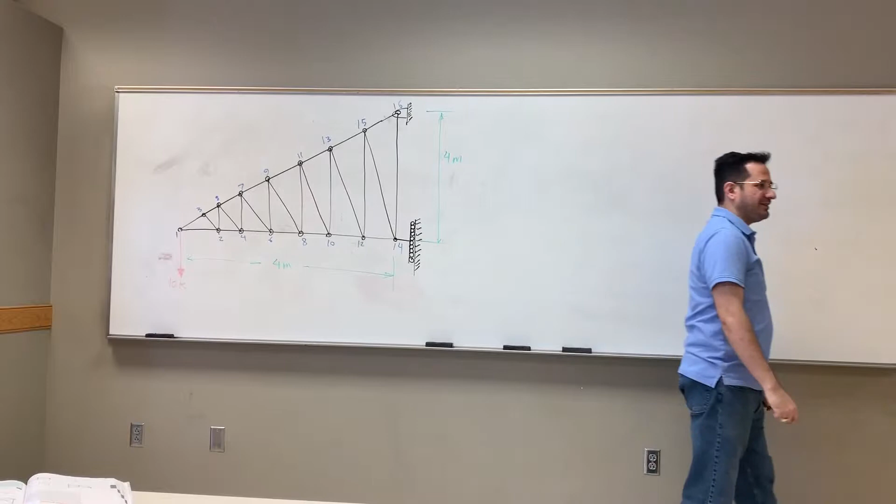So here, if I ask you, this truss is given, find the force in all members, and you only have 2 minutes, then it's kind of like a big confusion. Well, if I write the joints, I have 16 joints, each one has 2 equations, so I have 32 equations to solve. How can I do it in 2 minutes? Right? But you got to be a little bit smarter. Say, I have this technology of zero force members that I can eliminate before I analyze my structure, so I can clean it up. So, where can I find my zero force members?

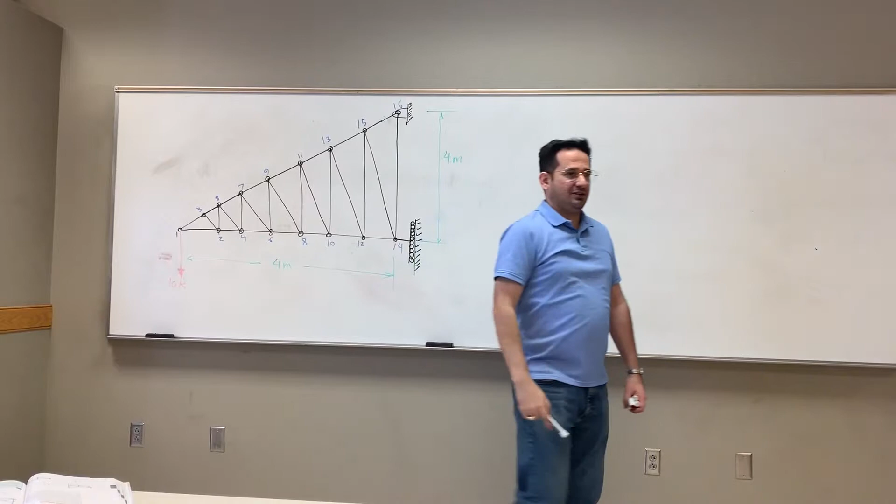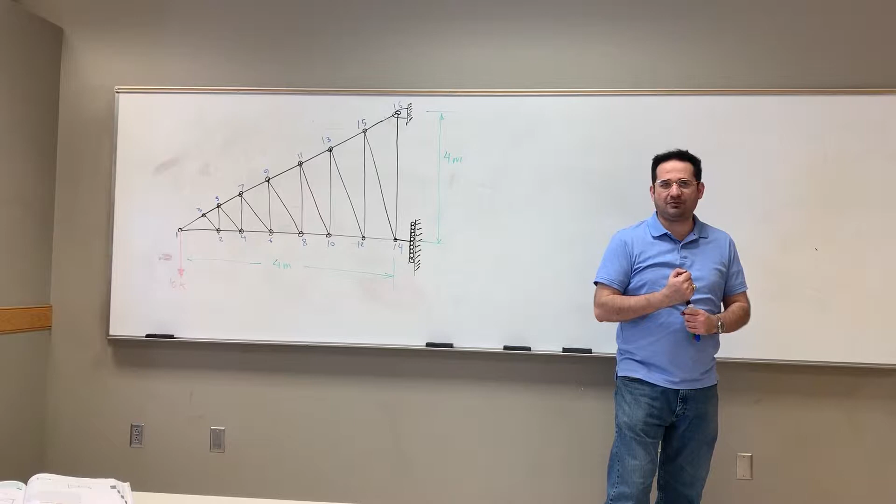Do you have any idea? So zero force members are either 2 members, 2 bars connected together, no external reaction, both of them zero, or 3 bars connected together, no external reaction, and 2 of them must be collinear. The third one is 0. Which one happens here? Or maybe both. Can you find it? Do I have zero force members here? Which one? 3. At joint 3? All of the middle ones. Exactly. That's the conclusion. We reached that. So

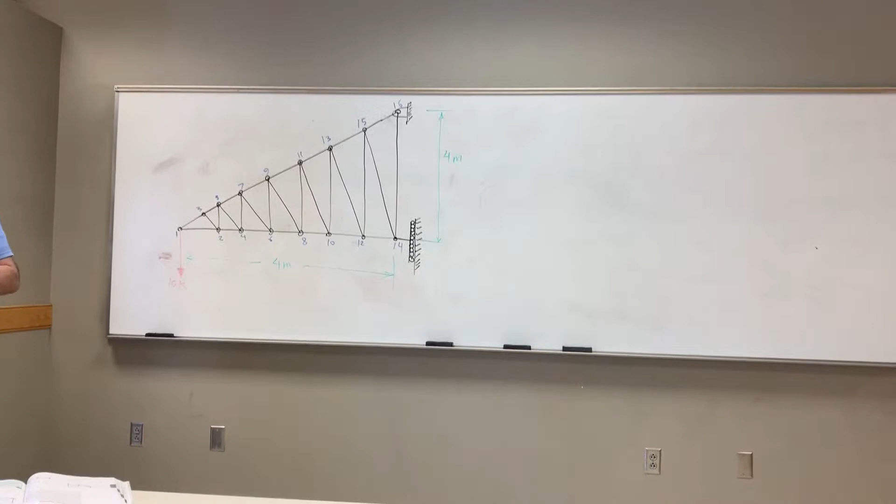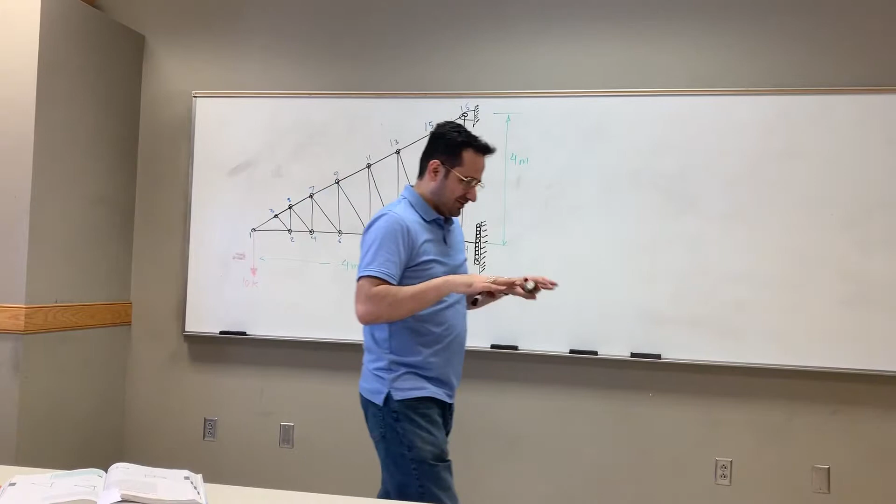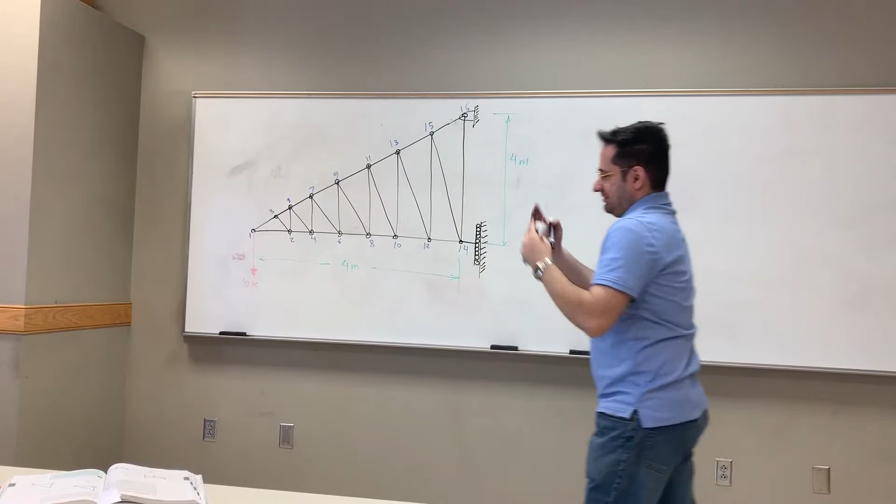Some people go super fast, and some students don't know what's going on. I mean, we always have a big difference in the classes. I don't know why. Like the pattern we had in the midterm, it's always the case. Some students are super duper good, and some students are just super duper, you know, sucky. We don't have average. I'm just confused. Why is this the case? I couldn't figure it out in these years that I've been teaching here.

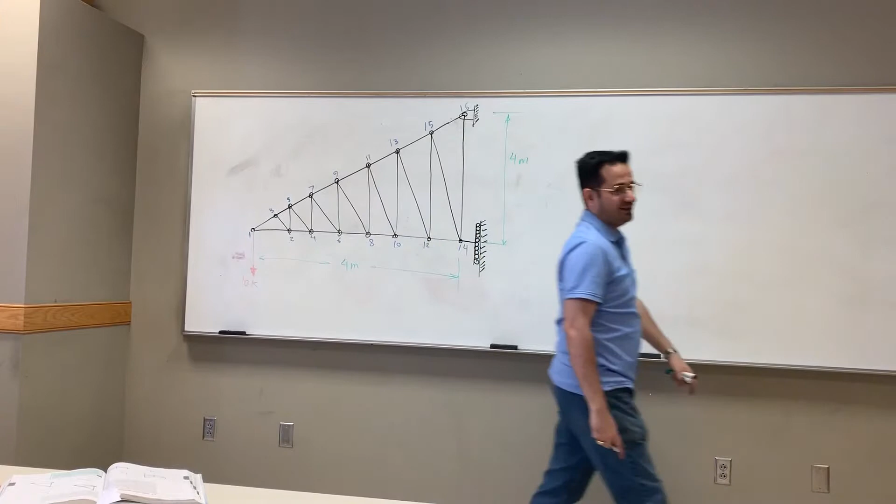But as you can see, joint 3, right? Joint 3 is a good example of the second part. We have 3 bars connected together. No external reaction. Like if I have a force 2K here, I can't say this is a zero force member. But look, joint 3 is free, no external reaction. 3 members connected together, and 2 of them are collinear. So the third one should be 0. Which one? This guy. The force in this member, 2-3. So if the force is 0, I can clean up the structure before, because it has no effect here, right? You can just get rid of it.

Force is 0. That is only put there for the purpose of stability, like in a case that you have a force here. Because the structure you design should be robust. If you have arbitrary loading, worst case scenario, then it should resist. So these are extra bars put here just for the purpose of stability. But in this special case, you can just say this is 0, right? Am I done now? Now you go to joint 2.

So you're saying these bars are solely there for stability? They don't help the structure whatsoever? Because you can take this and apply it to a bridge. But those bars aren't there for stability, are they? Yeah. So let's say you use it for a bridge, but let's say a bird is flying, comes and sits right here. This is the bird, right? If it sits here and you don't have this third member, this structure is going to collapse. So this is purely for stability.

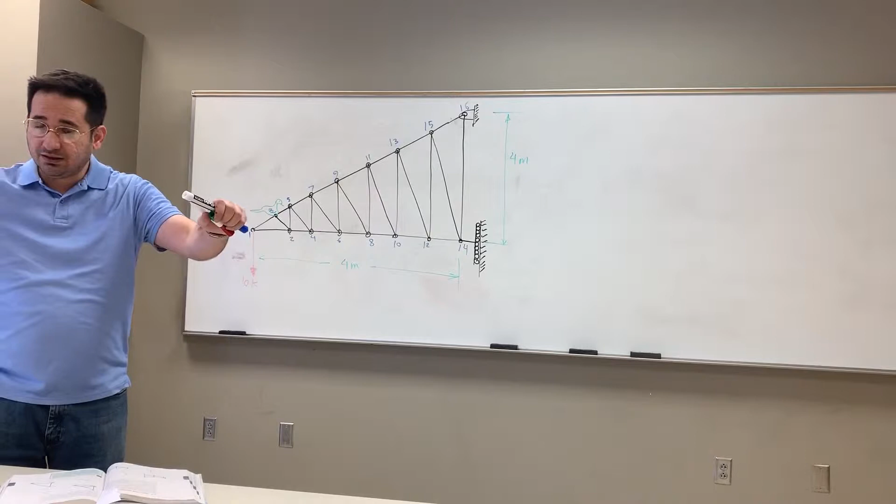If you are 100% sure that there is no external load, then you can just not put it there. Okay. But as I said, this is not the case. We always have external unpredictable loads that may be dangerous. So again, in this case, this is 0. Now, am I done, or do I have extra zero force members? Which one is a zero force member? 2. Pin number 2. Again, 2 members are collinear. The third one must be 0. Am I done?

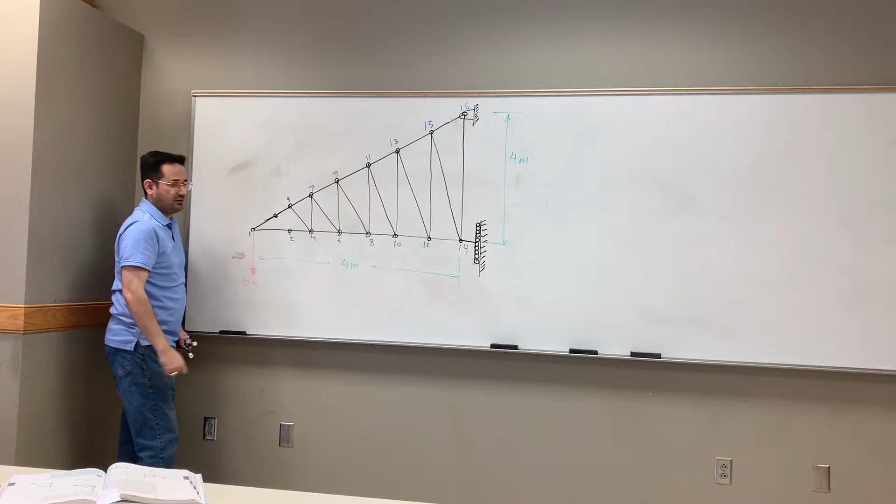5. Is there anyone that doesn't know what's going on here? I assume that you know. So this is 0. And again, 2 members collinear, no external load. The third one is 0. Let's say I have a force here. Let's say I have a load here.

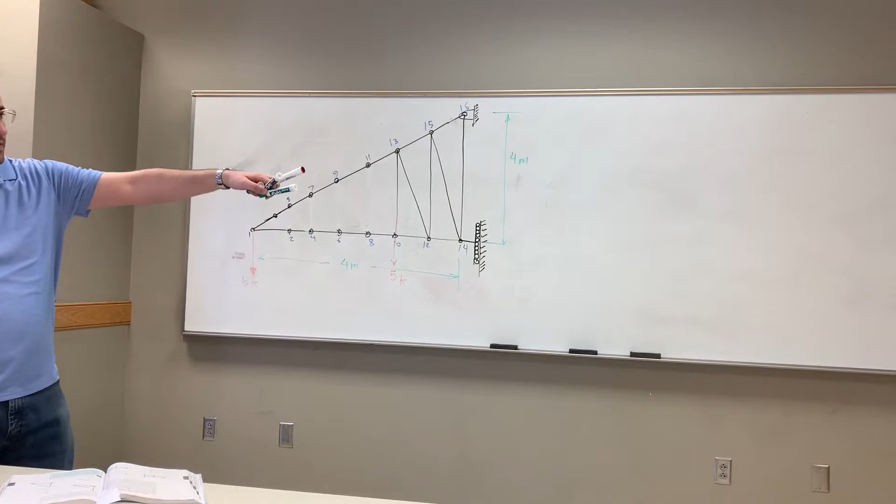5K. And here, for example, then again, this is 0, right? 0, 0, 0, 0, because this is 0. But what about this pin here? It has to stay. It has to stay, because look, we have 3 members, but we have an external load here. So we can't say this one is 0.

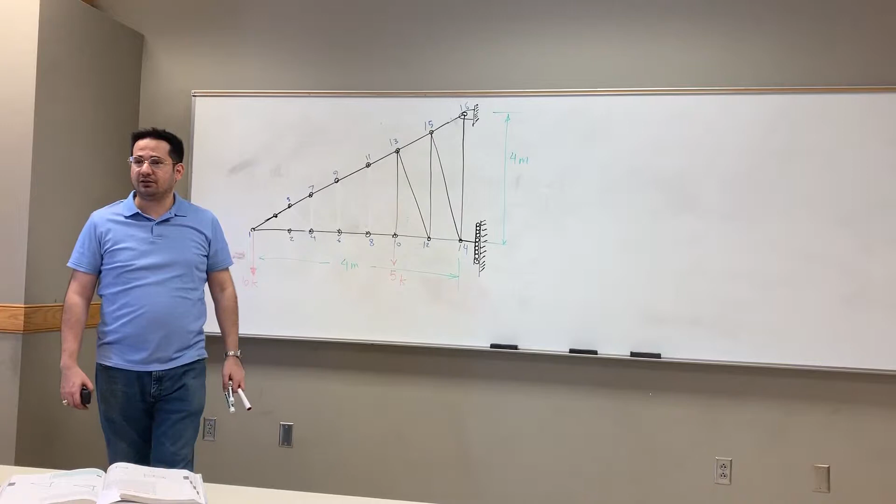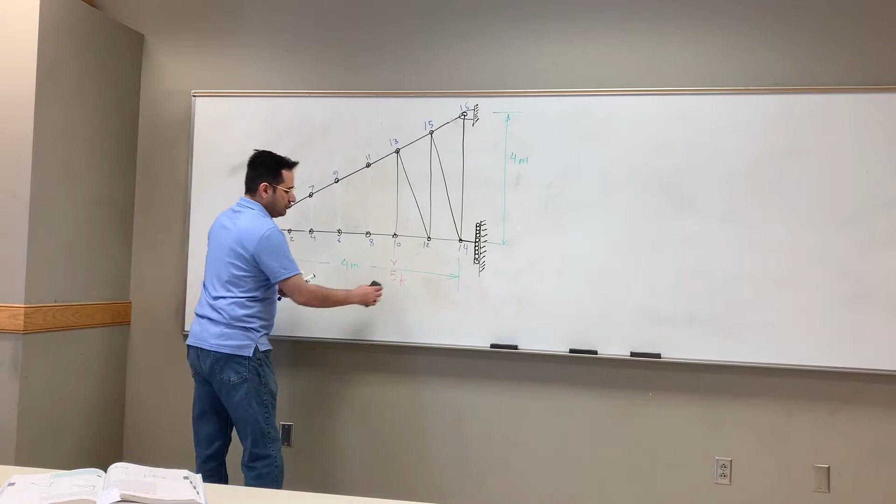But if that one falls, then they all fall. Huh? If that one falls and that's the only pin that you have, then they all fall. Yeah, that's actually exactly the proof that we use for that. So we're done here. But look, in the original problem, I didn't have that. I just put this for educational purposes.

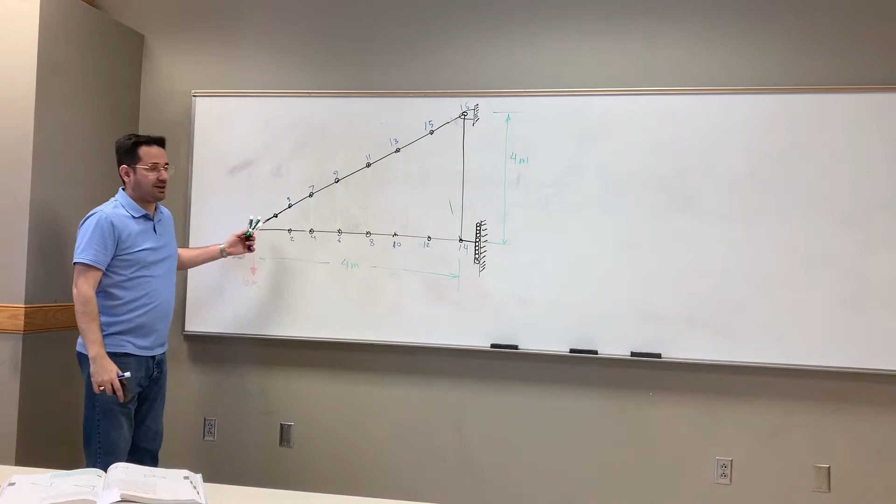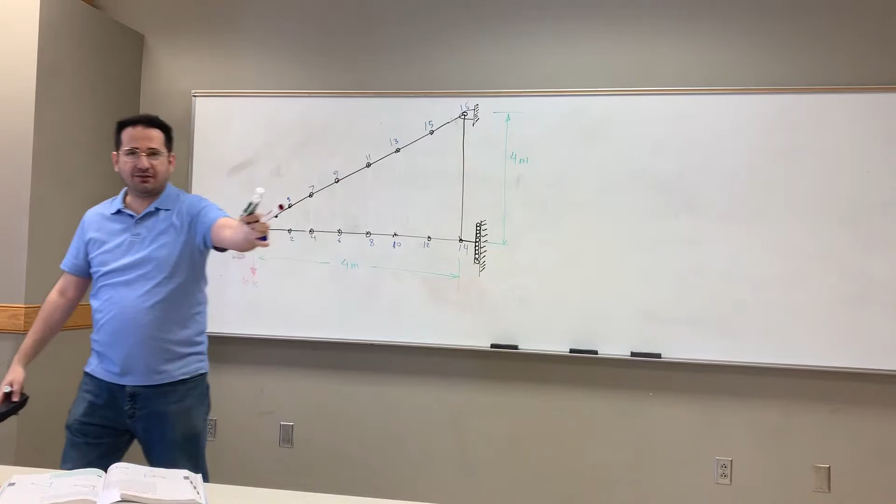So again, this is 0, 0, 0, 0. So in fact, your structure has 3 members. You see it? Now you're ready to do method of joints. So this is the simplest truss you can ever get. You can't clean up any further, right? So now you go ahead and do method of joints.

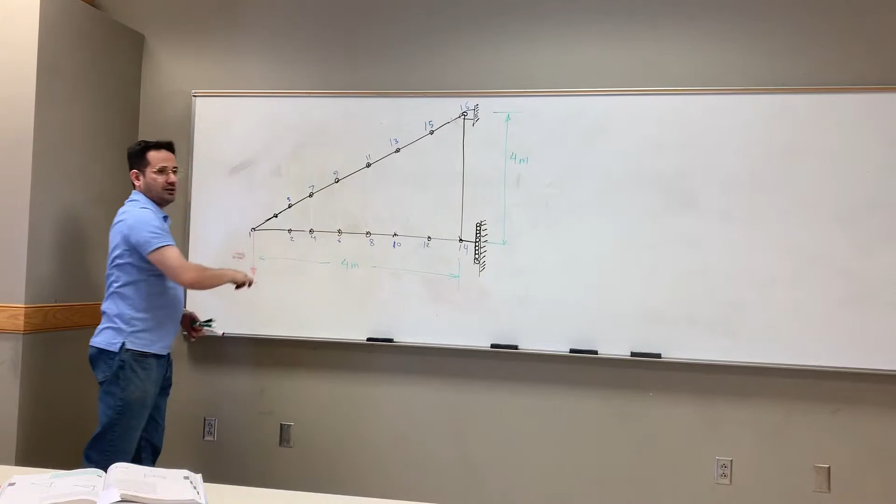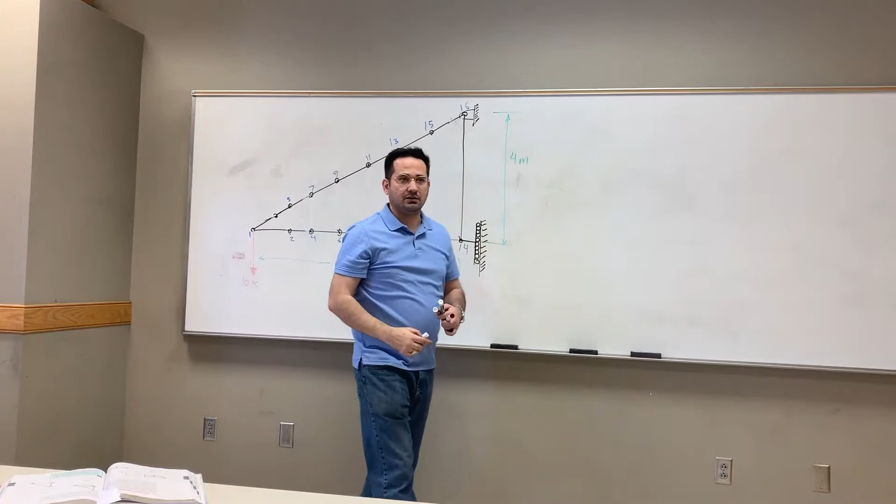So you have joint 14, joint 16, and joint 1. And then you can find force in this member, which is this, which is this. You can take all this as one member. One member, one member. You see that? Another thing, method of section. Now let's talk about method of section. Let's say you have a structure like this.

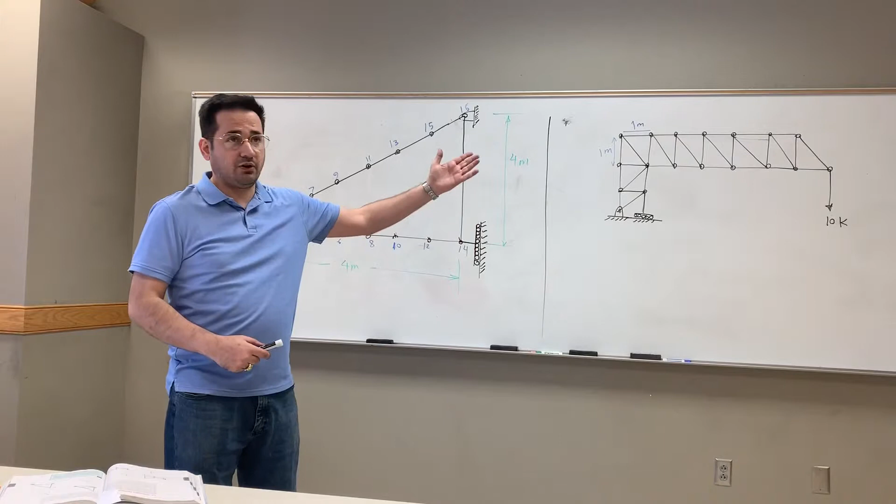Now, this example of a crane. It's a truss structure that is designed to take heavy loads and move them up without adding too much weight. So it's an economic structure. So if your boss gives this structure to you and says, find the force in this member, let's call it member 1. Only this part, right?

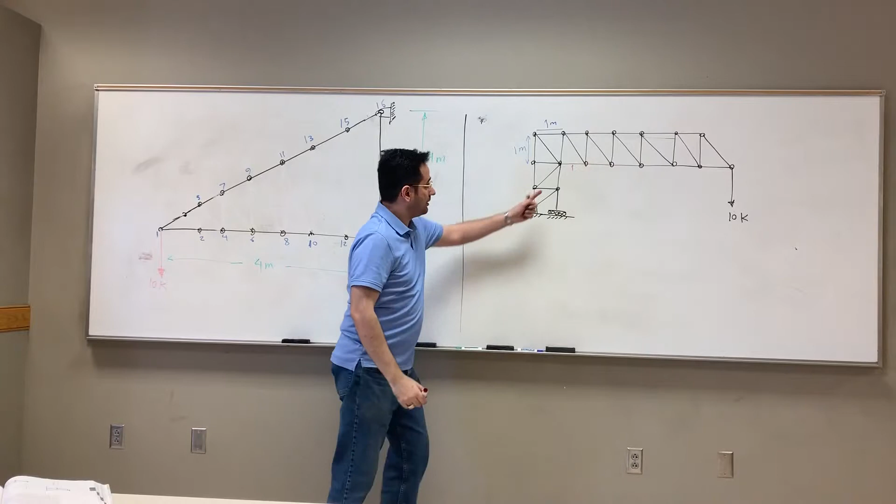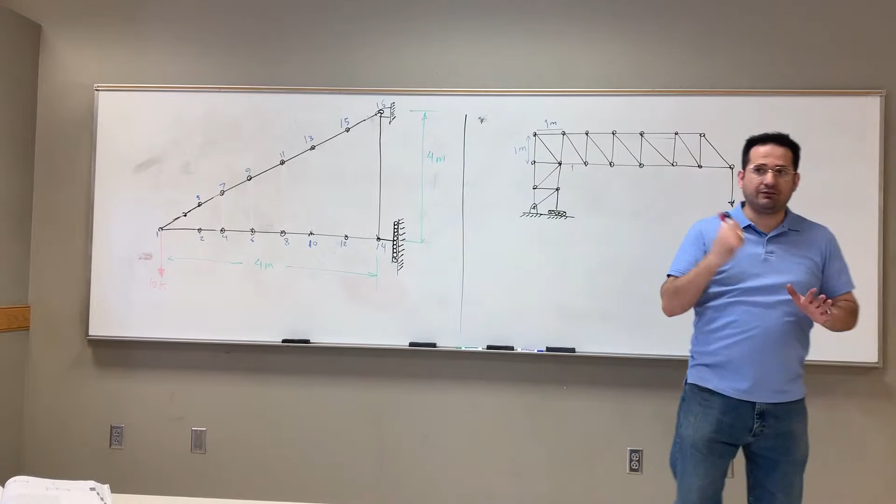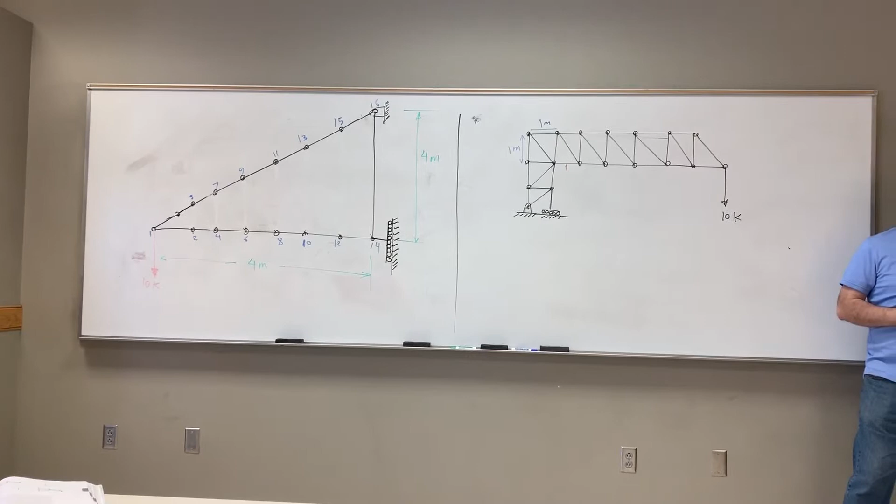Not all of them. Then you say, well, I know the method of joints, and I know that the method of joints is pretty robust and it can solve everything. So if I apply method of joints, I can find it. And I say, yes, you are right, and that's true. If you can use method of joints, then you can find it. But it would take a long, long time. So if you want to use method of joints, where should you start solving? Any idea?

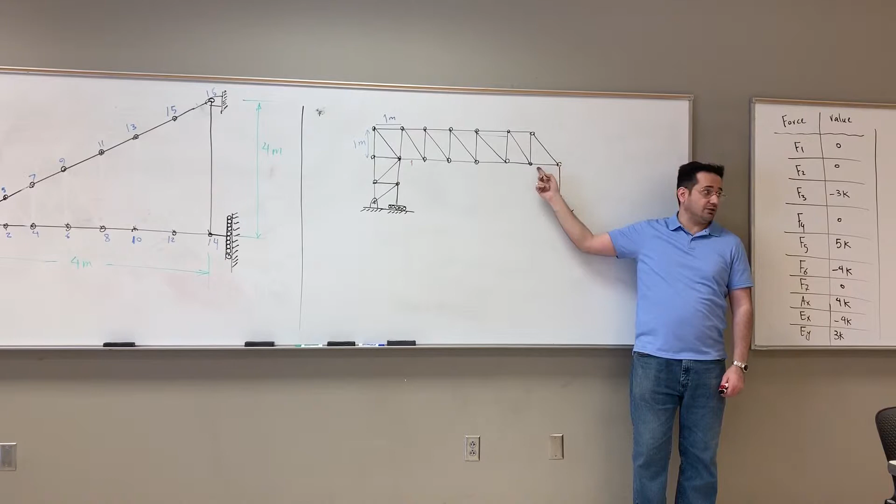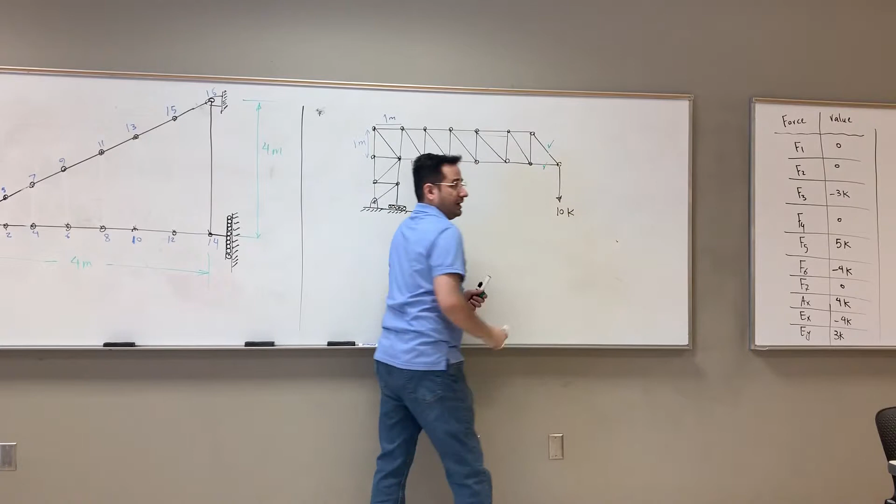So you take all the joints, draw FBD, write the equations, solve. But you can start from here. How many unknowns do you have here? 2. At this joint, here and here, right? So you write 2 equations, 2 unknowns, solve it. So let's check mark it. You write the equation for that joint, you solve it. And then what is your next joint to write the equation and solve it? Which one is your next joint?

This or this? Either. No, if you take this, 1, 2, 3 unknowns. You see that? But how many unknowns do we have here? 2. So your next is here, right? So this is your joint 1. You start to solve it, and then you go to this one. Then you solve, you get this one and this one, right? And then you go to this pin, or joint 3. How many unknowns do we have? 2. Then if you solve the equations for joint 3, you get this one and this one.

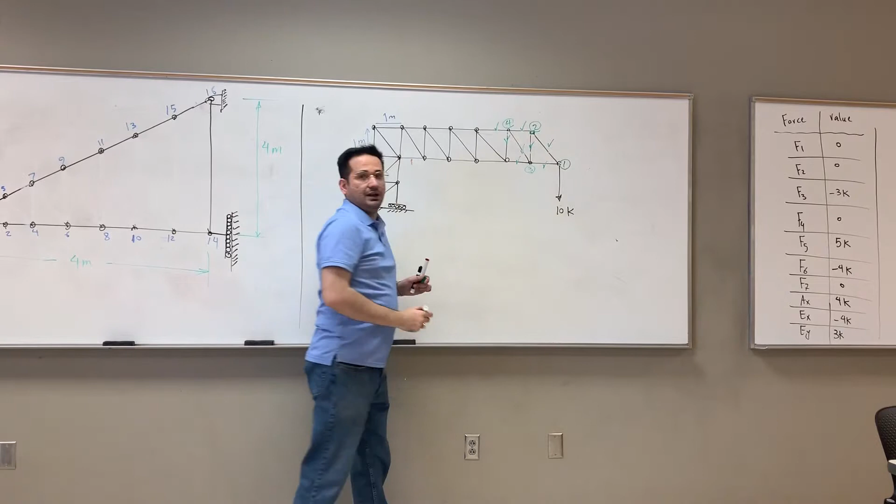Now which one is the next? The top, yeah, this one. So this one is 4. If you write the joint equations, you already have this guy and this guy. So your unknowns are only this and this. So you get this one and this one. And the next one is this joint, right? So you have these 2, you get these 2. So you can see that this procedure will work, and you eventually reach this member number 1 and get the value and tell your boss, hey, I finally got it. There it is, right?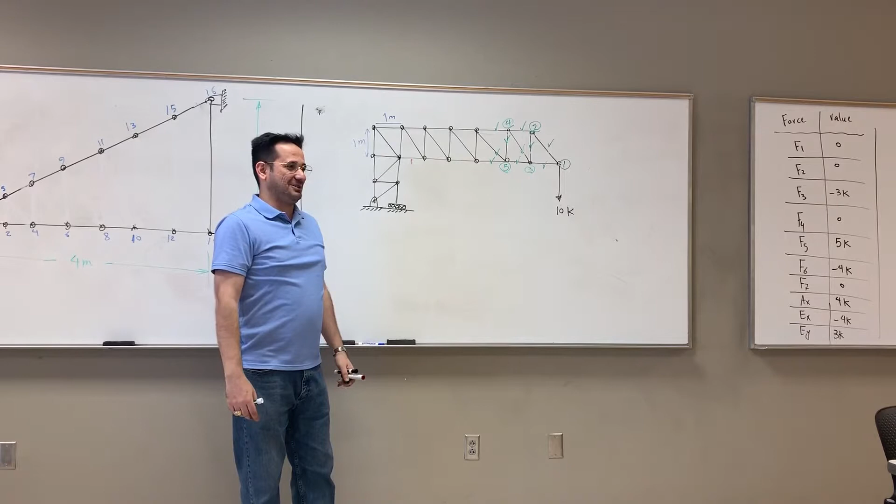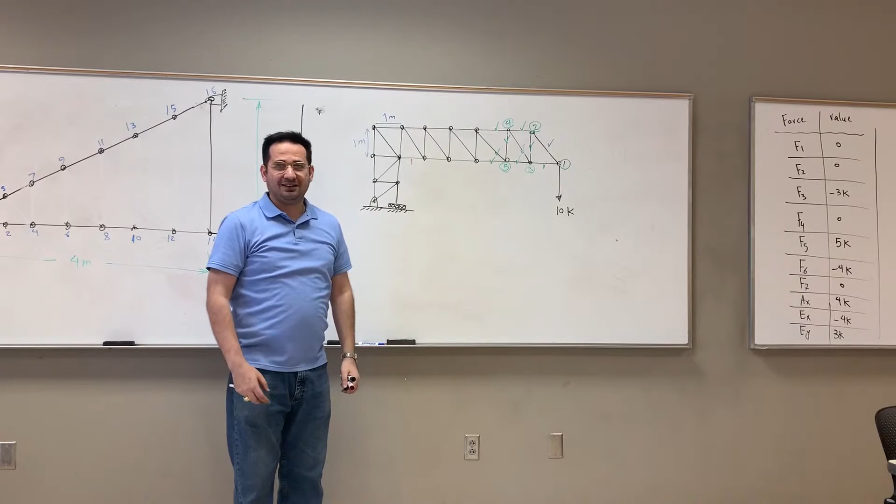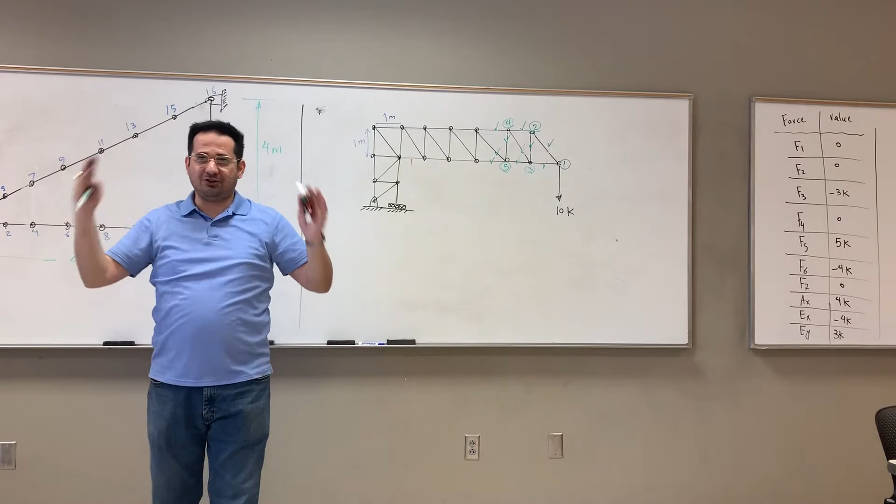And then you get fired because it takes a day for you to do that. And your friends are already done, they're finished. So then you get upset. What did I do wrong? Well, look, there are easier ways to do that. Any idea how we can directly get this one here? I know that I can use method of joints to start at some point and go marching all the way up to here. But it takes such a long time. I don't want to waste my time. How can I directly get the value of force in this member?

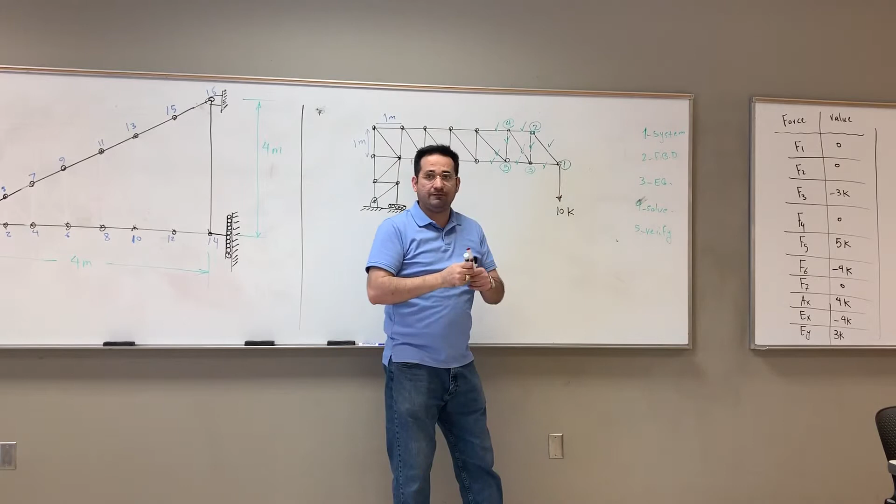Yeah. In fact, in the 5 steps: system, FBD, equation, 4, solve, 5, verify. In the method of joints, we fixed step 1 to only joints. So here you get 1, 2, 3, 4, 5, 6, 7, 8, 9, 10, 11, 12, 13, 14, 15, 16, 17, 18, 19 joints. So 19 different systems and 19 different FBDs, 19 times 2 equations, right?

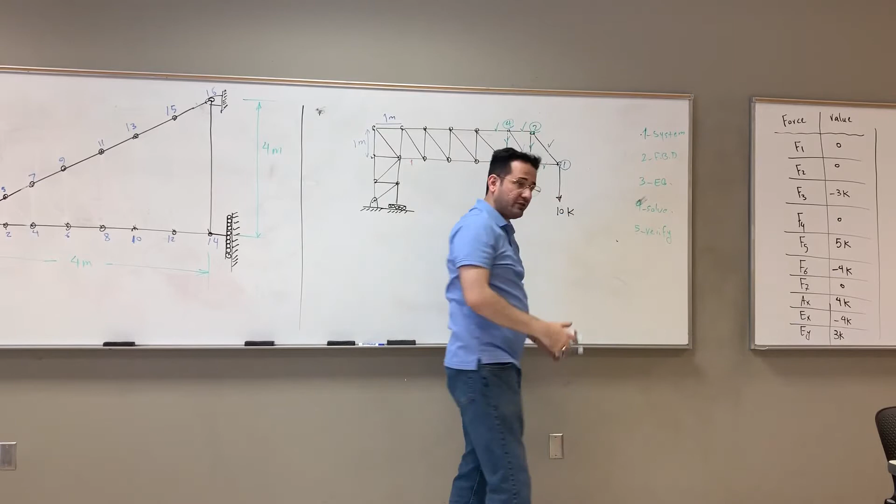But I say let's go back and take our system as a part of a structure, not our joints. Let's, in particular, as you said, see that dashed line that we used to walk around in? Let's call it section. Let's section this structure here, imaginary cut, imaginary section, and just consider this part of the structure. Let's say this is my system, only this. Everything is external, right?

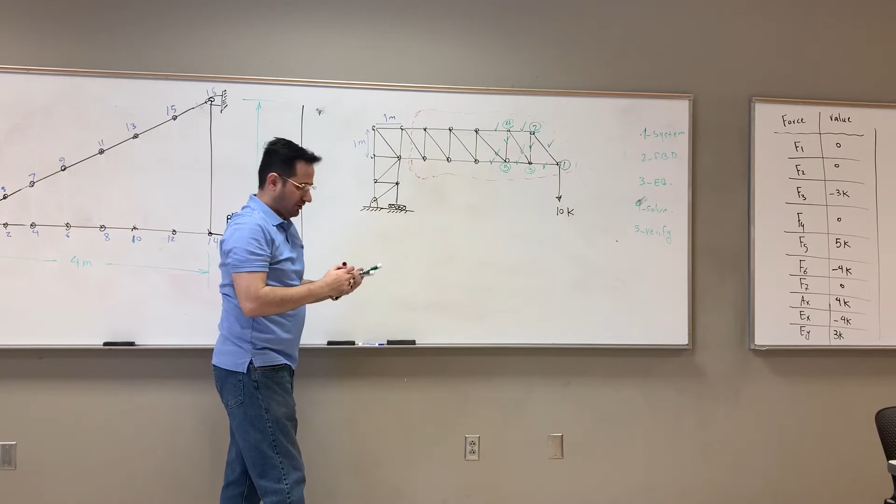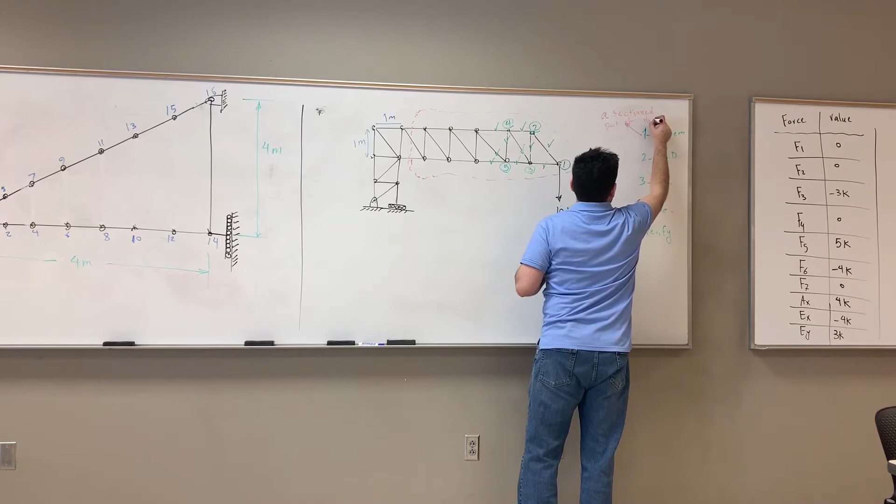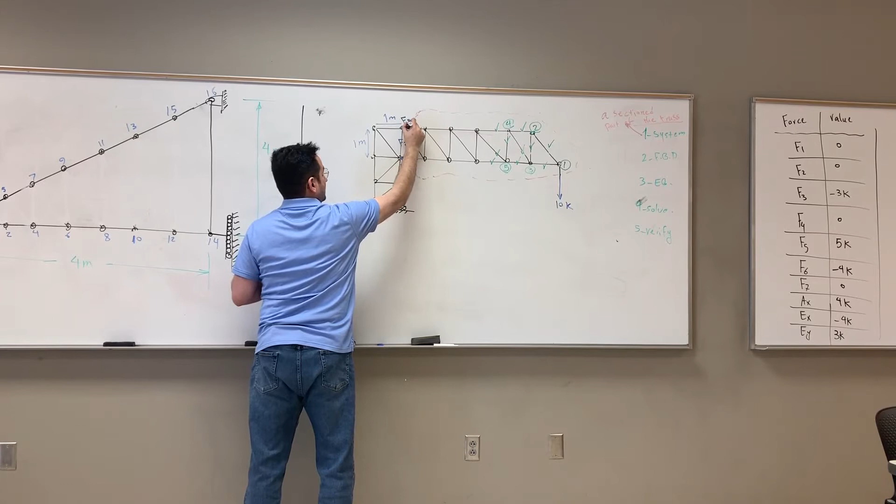Now the system is a part, a section part of the truss. That's the reason we call this method of section, because your system is an imaginary cut part of the truss. Now, if I draw the FBD, what do I get? I have a 10K here, right? Then walk around it. You have force here, F1. A force in this member, F2, and a force in this member, F3. That's the point you cut, right? There is going to be a force coming from this member.

There is no moment because this is not a beam. This is a thin bar, so you cannot have the bending moment, and you cannot have a shear load. You remember we defined the truss. The forces are only axial. So you have F1 here, F2 here, F3 here. Then continue walking, come back to the start when you're done. This is the FBD, free body diagram, right? Everything inside doesn't matter to you. This is interior. Just these 1, 2, 3 unknowns.

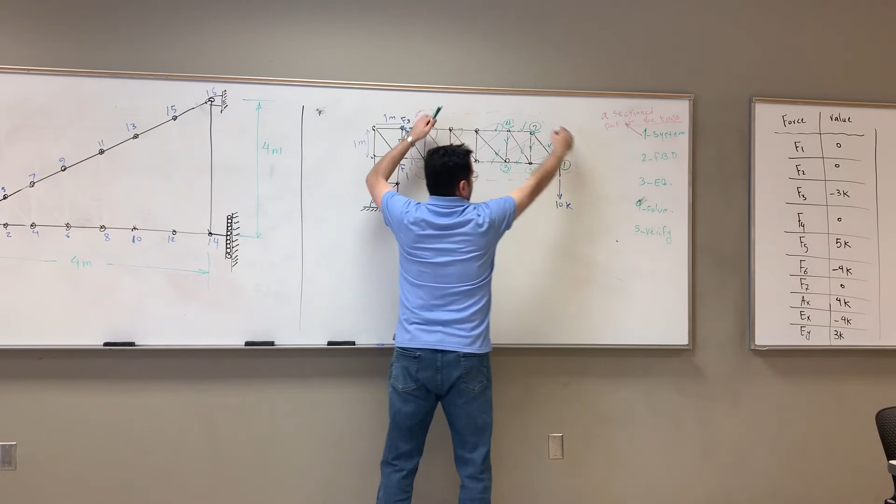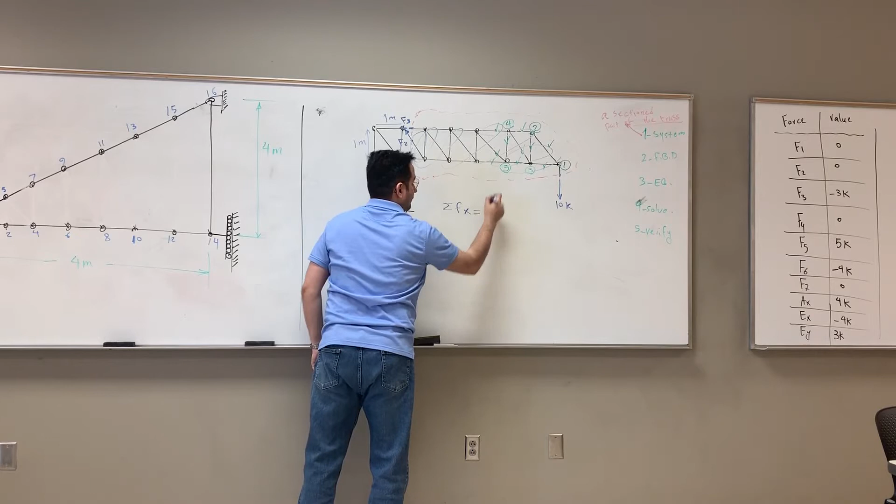How many equations do I have for this system? It's a 2D system. How many equations do I have? 3. How many unknowns do I have? 3. So 3 equations, 3 unknowns. So you can immediately get these. And then you don't get fired. Right? Now, let's do it a little bit faster. I know that I write summation of force in x equals 0 for this system, summation of force in y equals 0, and summation of moment about any point equals 0.

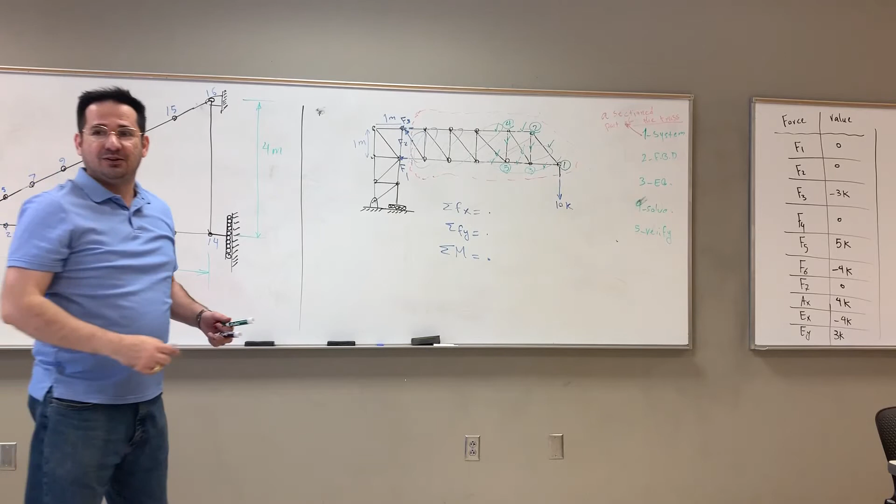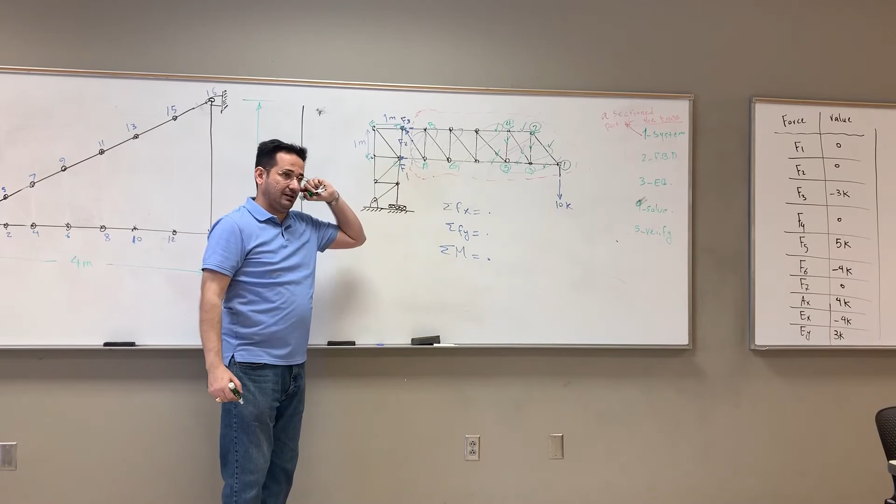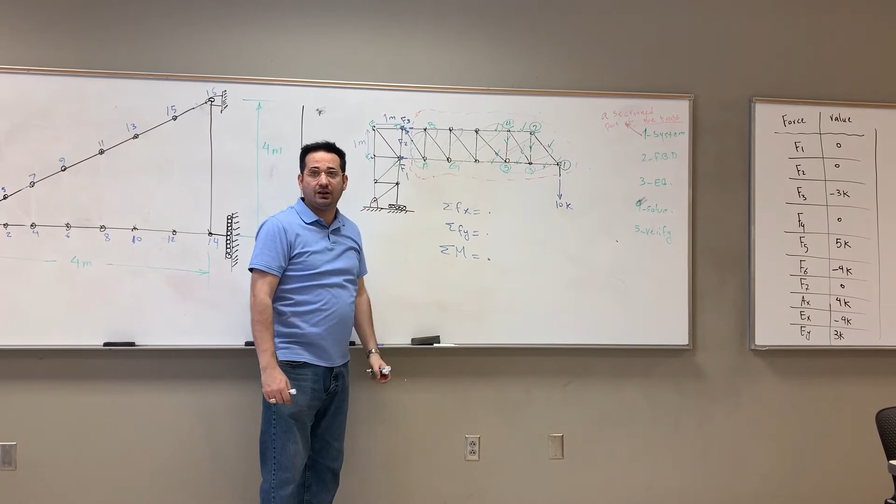Right? What point should I choose? If I just want F1, not F2 and F3, what's the fastest method to get F1? Let's say I have these points, A, B, C, D, E, F, and G. I know that if I write all 3 equations with 3 unknowns, I get F1, F2, F3. But I don't care about F2 and F3 for some reason. I'm only interested in F1. How can I get F1 with one shot? Moment around D. Summation of moment around D.

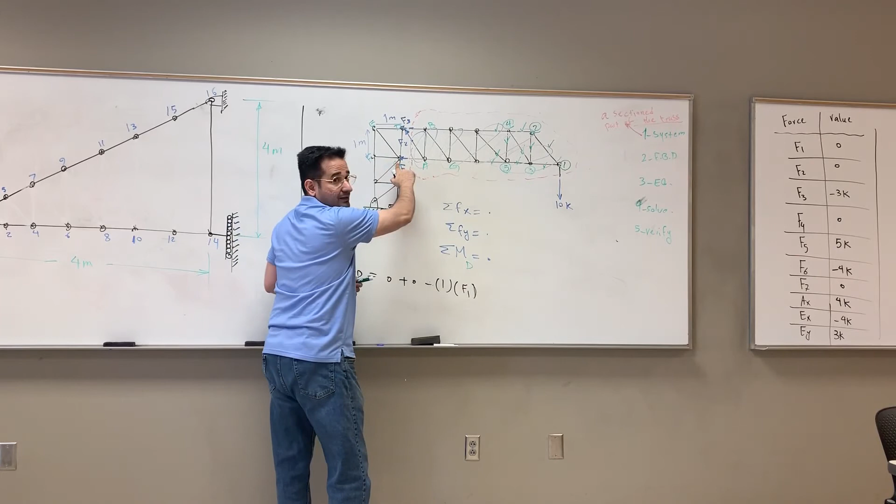Why? Because F2 and F3 are going through D. So they don't show up in the moment equation. So let's write this equation: summation of moment around D is equal to, let's start with F3. What's the moment of F3? 0. F2? 0. Plus F1? 1 times F1, positive or negative? Negative. And then, this is the external one.

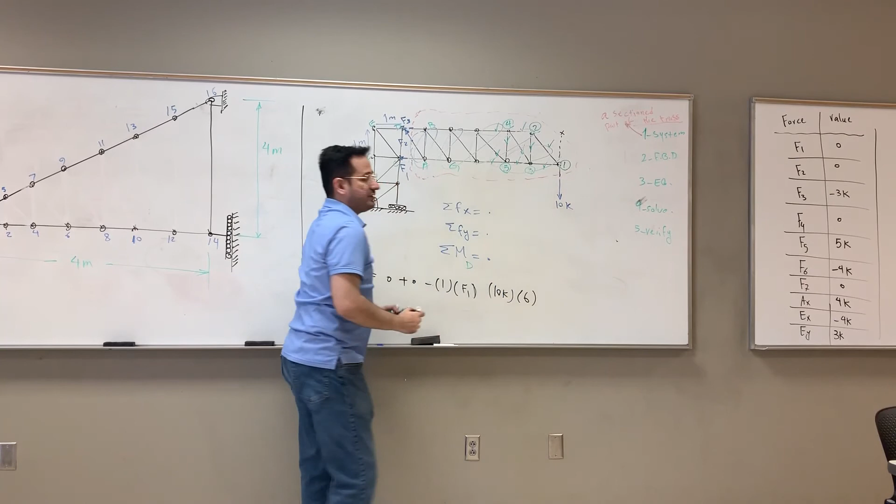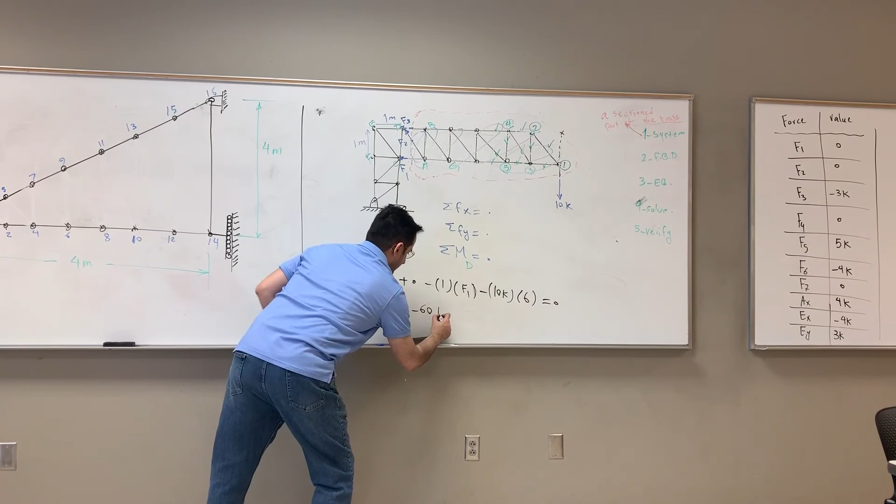So what's the moment of 10K with respect to point D? 10K times, see, move it here. You see, this is the point. So the distance is from here all the way to D, which is 1, 2, 3, 4, 5, 6. Positive or negative? Negative. Is equal to 0. So F1 is equal to negative 60. You see, one line, one shot. You can immediately get it.

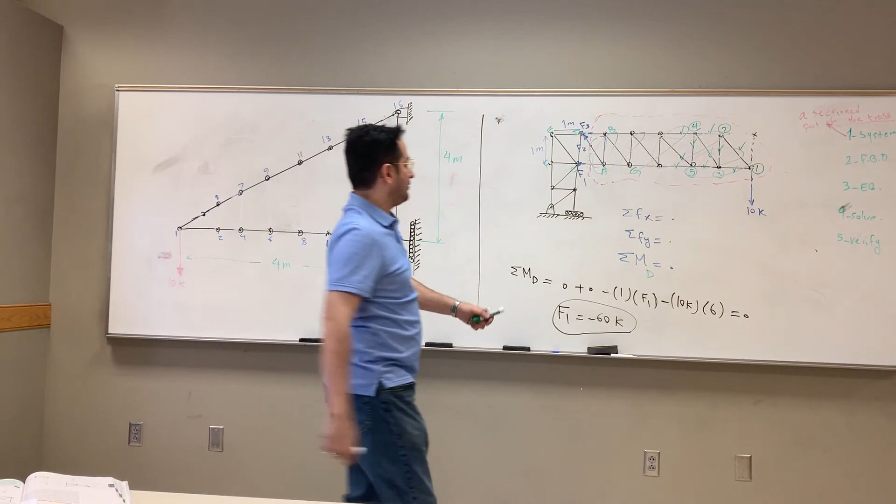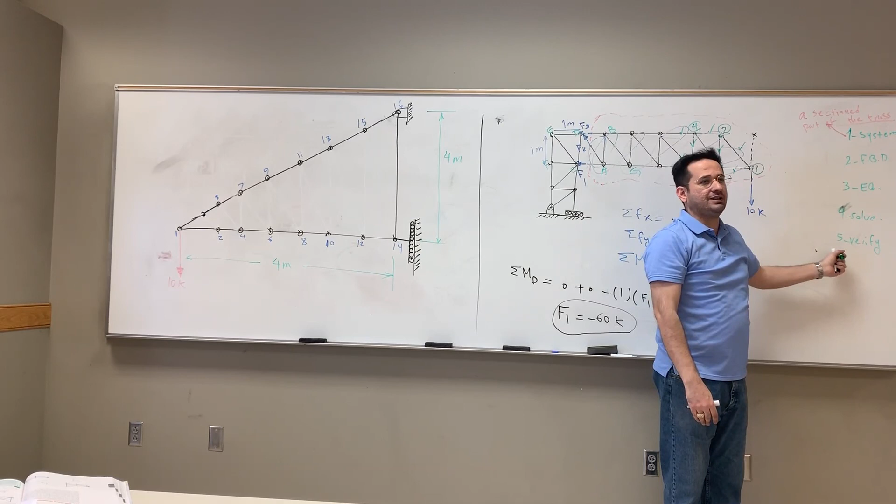This is called method of section. As you can see here, we did an imaginary cut. But for you guys, since we started with 5 steps, you already know that this is nothing new. It's just a different choice of system. Okay?